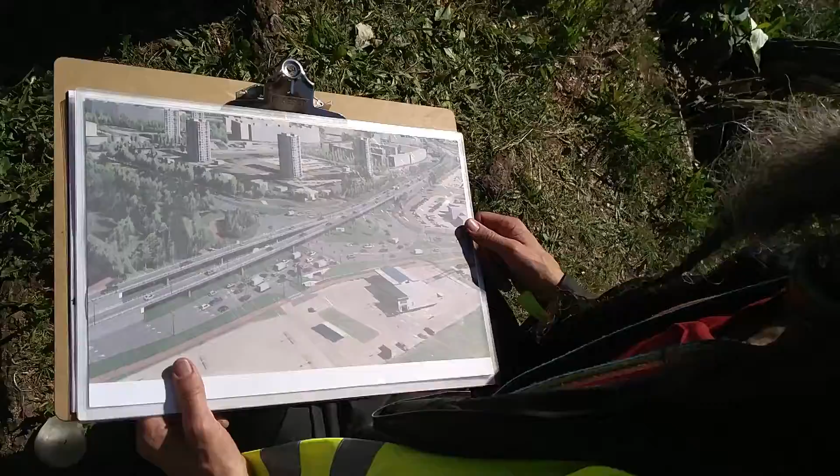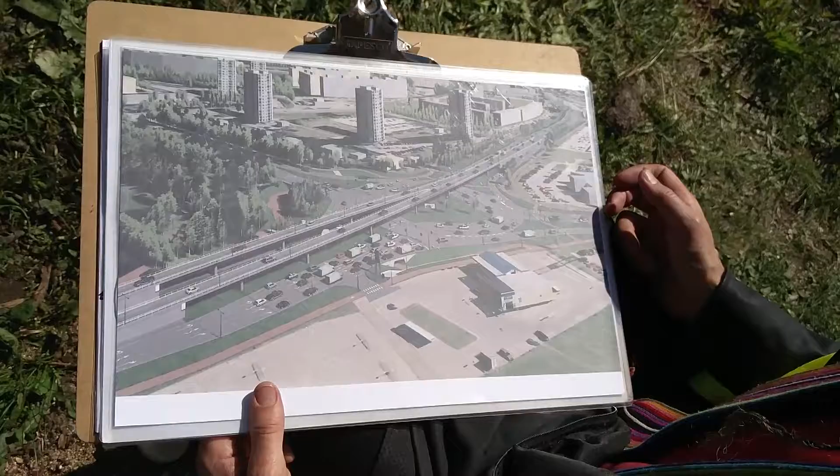So here we are, here we see Haabersti, the new Haabersti ristmiku project designed by the project. We are exactly here right now at the Paju tree, and if we look at the Paju tree location, we see it here. This is how the project has designed the road system, and they have designed the walking road.

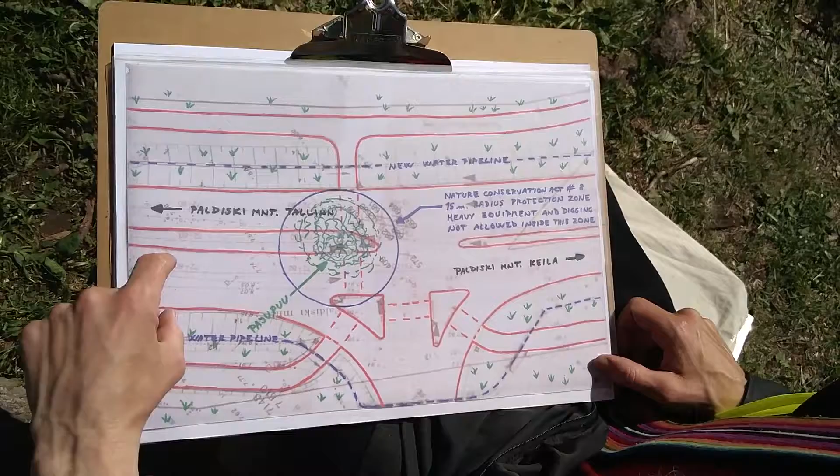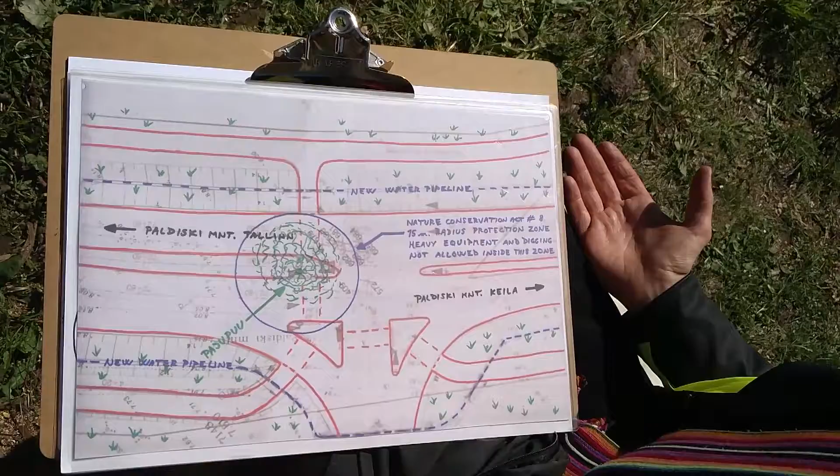They have designed 3 lanes in this direction, 2 lanes in this direction. Here are coming 3 lanes in this direction and 2 lanes in this direction. So 5 lanes in total with the new road system. What we see from the plan is that this tree, Paju, can be saved. There is no technical or practical reason why not to save it.

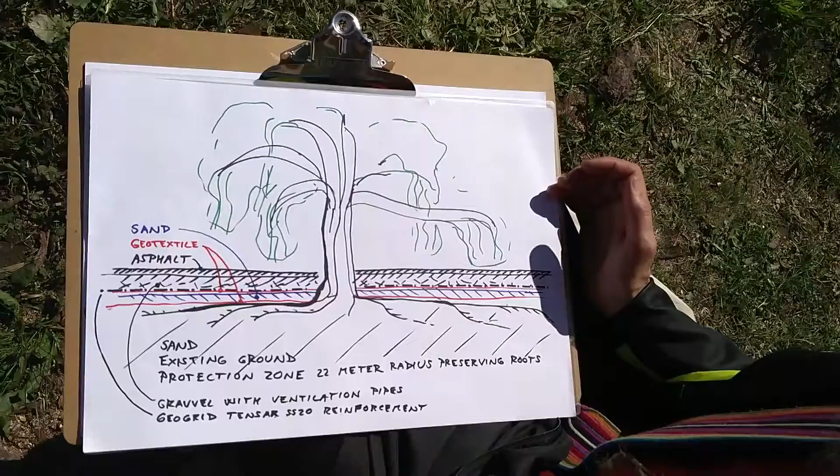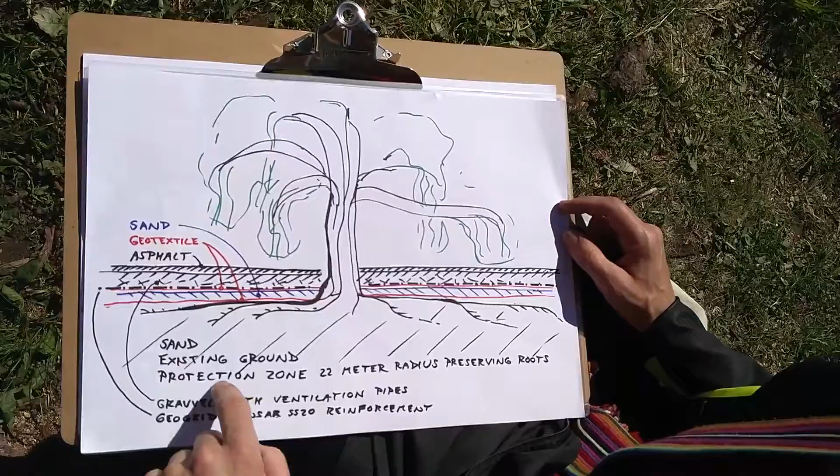And in the worst case, if the road is built exactly how it has been planned, it is fully possible with this technical solution. Here we have the tree. We put the geotextile on top of the existing roots in a protection zone with a 22-meter radius from the tree to preserve the roots. And then we put a pillow of sand 20 centimeters thick.

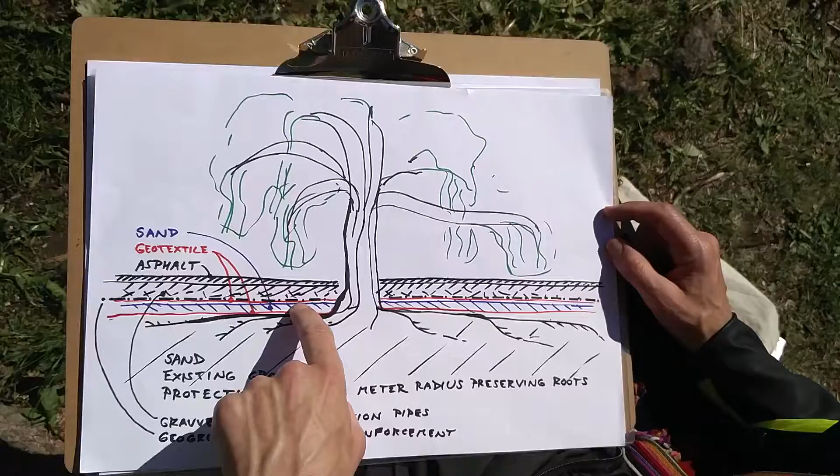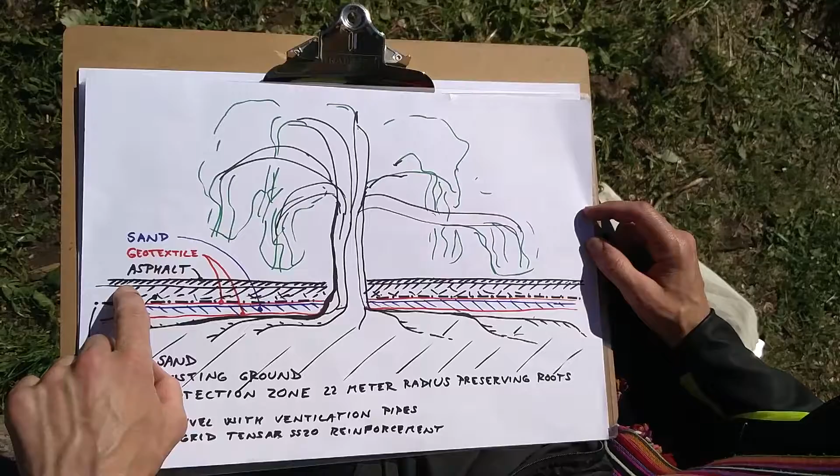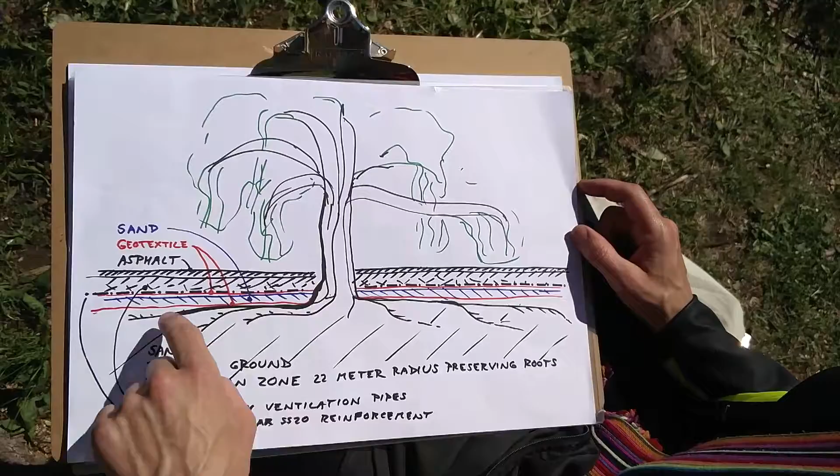Then we put the geotextile on top of it. Then we put the geogrid, Tensar SS20, reinforcement, and gravel with the ventilation pipes. And on top can be the asphalt or tiles. And this kind of system can be used for the walking roads crossing the root system and the car roads crossing the root system.

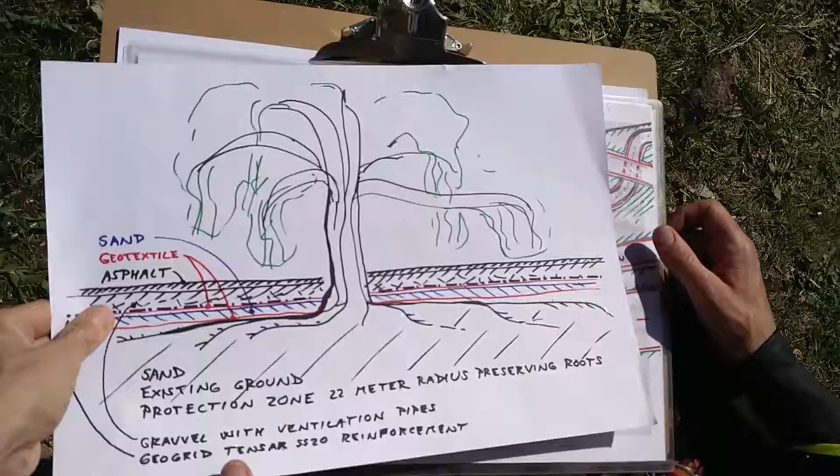Vegard, can you? Yes, very well. I'm good. And can you put it back? I would record the text, so the one who is going to watch your video will see what you have written.

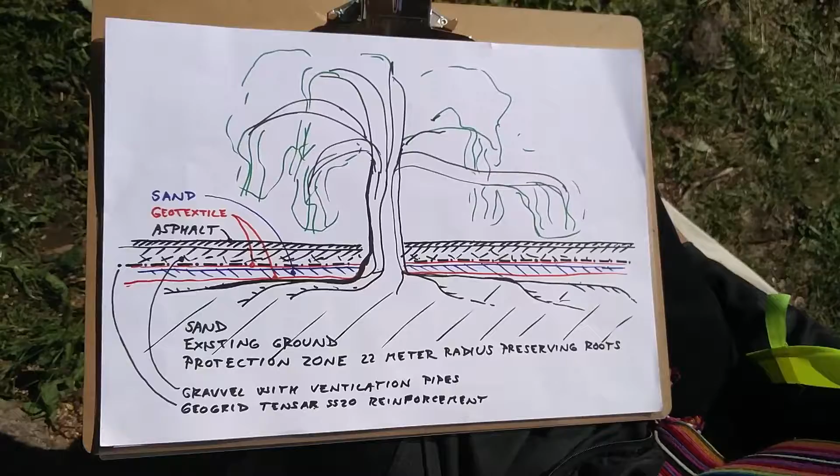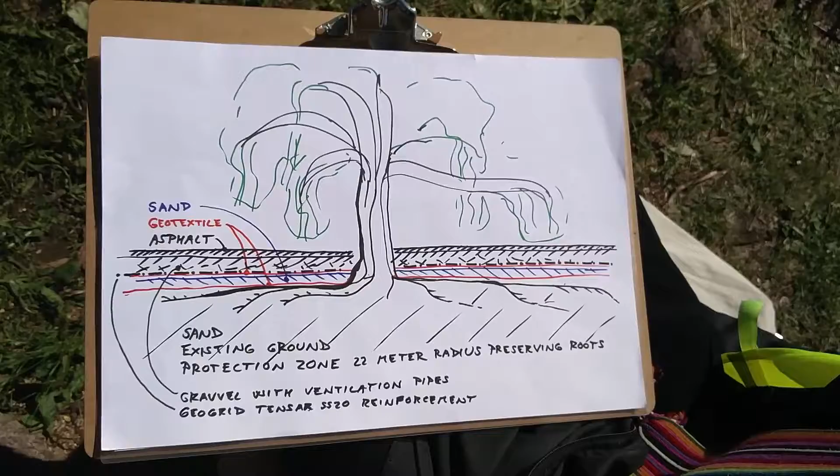And you, Vegard Kristoffer Emanuelsen, you are from Norway and you are an inhabitant of Väike-Õismäe, are you? Yes, and when I saw that this project is going totally far away from what was originally planned, and they are ruining the living space and the green areas, cutting the trees illegally, then I took action and wrote a complaint to the Kommunaalamet and Keskkonnaamet.

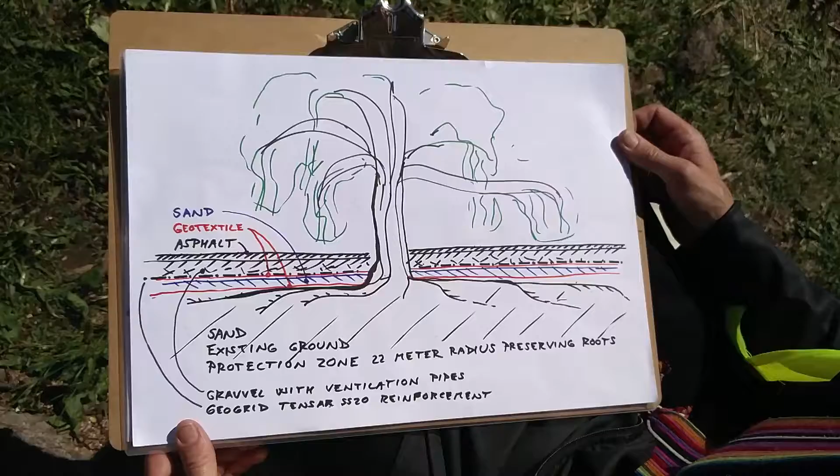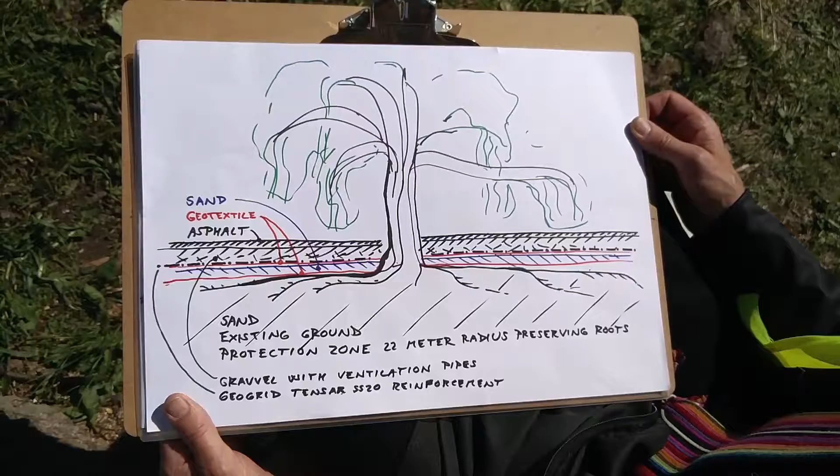And if you talk about your background, then your claims are supported by your education background. You are a city planner. You studied in university or college? Yes, in Norway. I am an industrial designer and product designer by education. But currently, I'm working with sustainable city planning in Tallinn, Tartu, and Pärnu on a non-governmental basis.

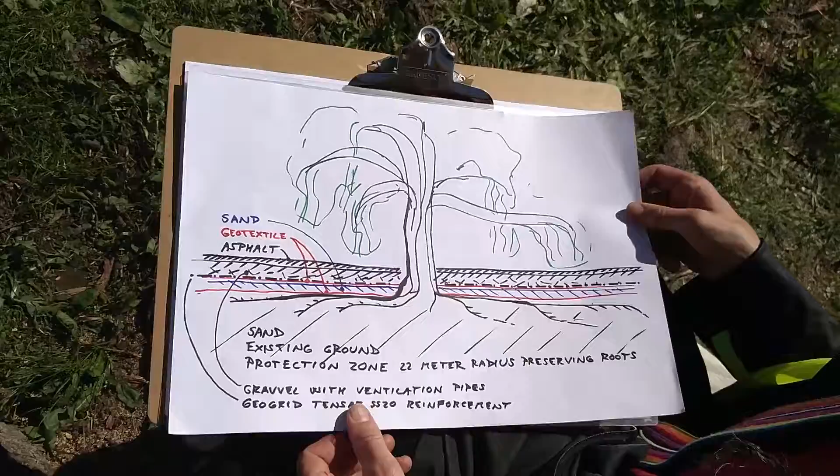All right. And I have been building and constructing all my life, so construction and technical solutions to challenges or problems are my profession and my skills. And what we see here is, when we look at alternatives to the plan of the project, it could look like this. So here we have the Paju tree. The planned ristmik will be moved to the Auroil gasoline station.

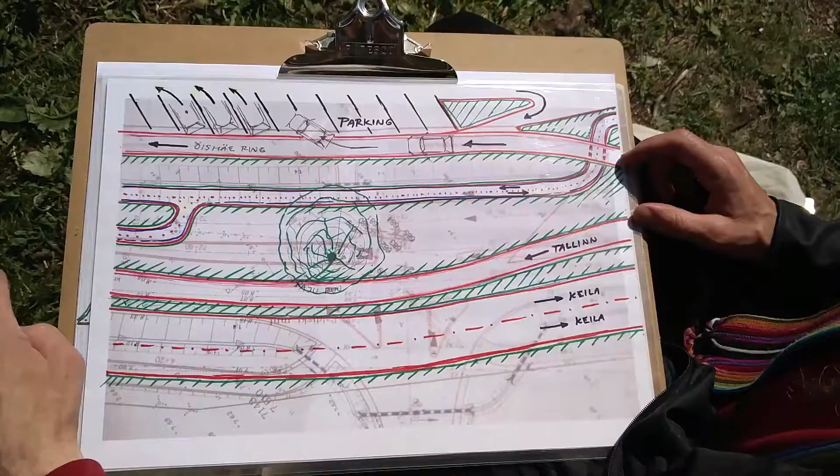And here are 2 lanes in direction Keila from Haabersti ristmik. 1 lane in direction Tallinn, which turns into 2 lanes before the bridge. Here is a walking road, which will go in the tunnel under. And here is a 2nd lane going to the local blocks where you can drive in and drive out for easy parking. And this lane will go around and end up in the Väike-Õismäe circle road.

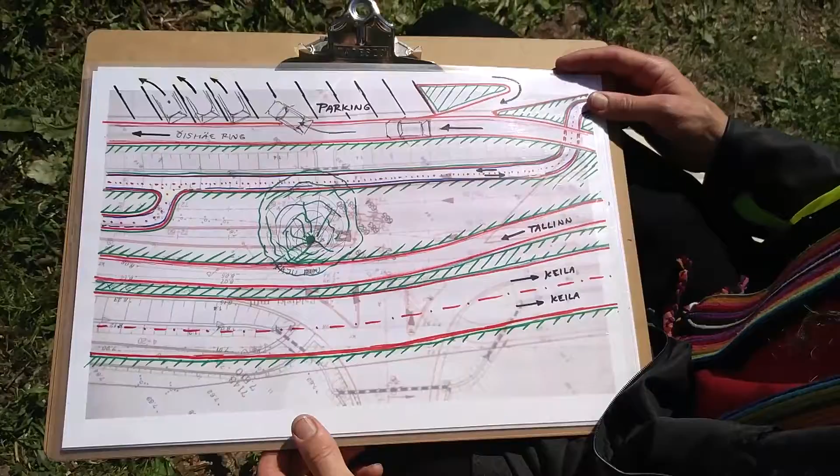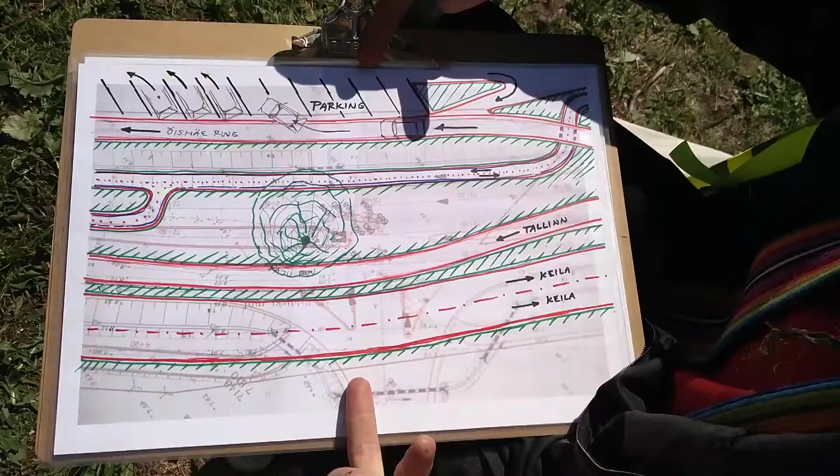So it will be quite comfortable to park your private cars in front of these apartment buildings, parking spaces, Road 163 and so on. Yes, and these local residents have complained to the local municipality that they would like 1.5 meter wider parking spaces because it's impossible to maneuver the cars normally. This plan can be built on the ground surface, just like it is, or these roads can be buried in a tunnel, and the same with the parking.

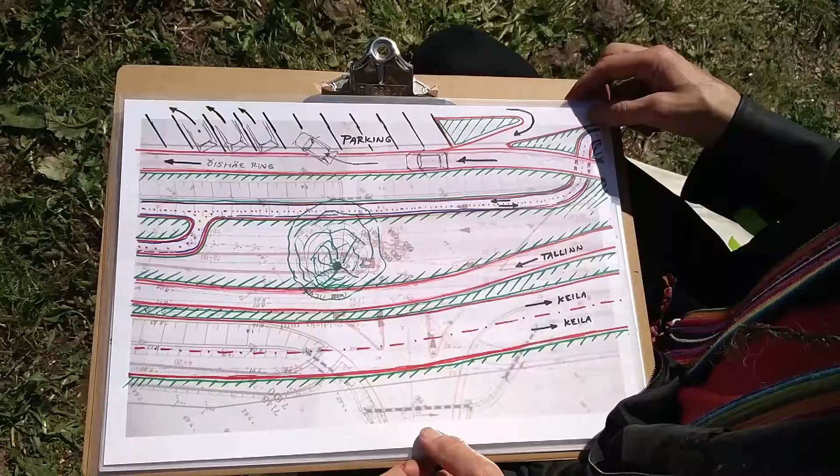And to be certain, if our deputy mayor in Tallinn, Kalle Klandorf, said on Wednesday to the public that there is no alternative to change the project, then you say that three driving lanes with a width of 3.5 meters fit on the side of the district? Yes, here. There is enough room.

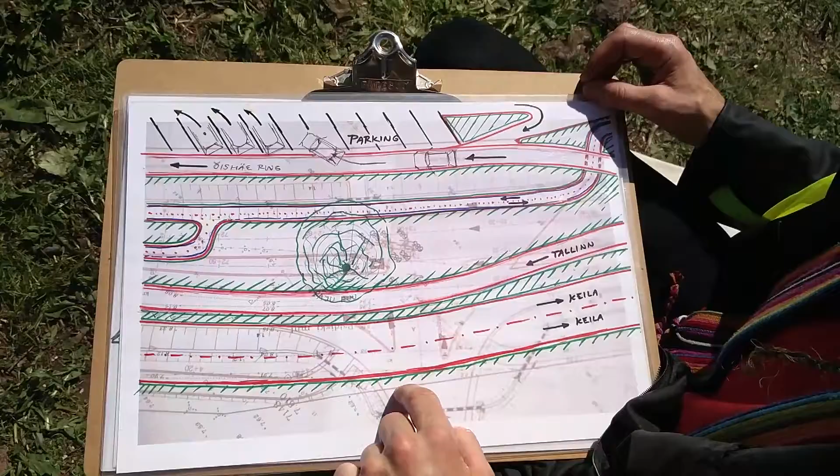Here we have the land border line. And the real map is a layer under this drawing. So here we have the border line, and here we have the other border line. But the state has also got the land. They have sold the land to the local municipality of Tallinn. So Tallinn is the owner of this land juridically, and Tallinn is also the owner of the existing parking place in front of the blocks.

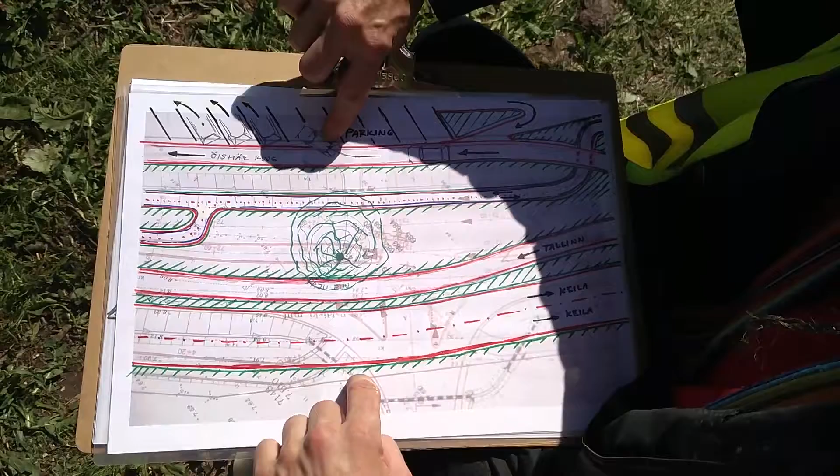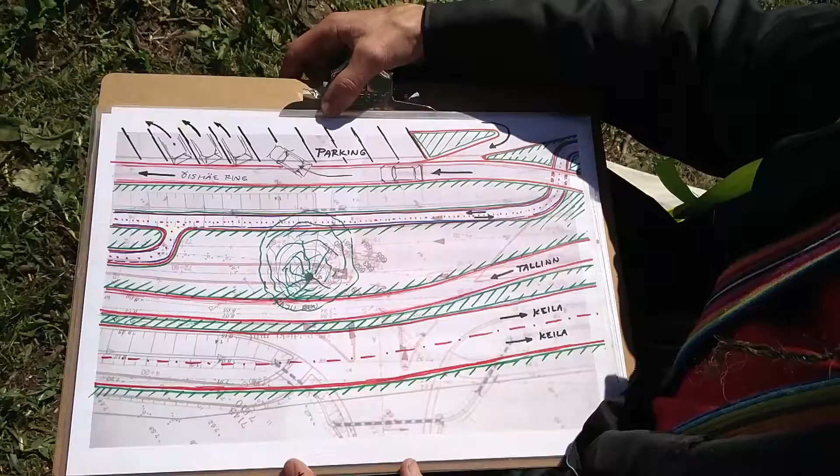Indeed, and actually this border is not in reality going here. It goes actually just a few meters from the block. So here is enough room to build the new road lines and parking place. So on the side of Kaarauta and district Pikaliiva, you say that next to the driving lane there is space for a light traffic lane as well, which is planned on both sides.

Yes, we can see from this drawing that here they have already planned a road going out from the Kaarauta, and this road is planned to go out here to the ristmiku. This ristmiku should be moved to the gasoline station, so this road which is planned from the Kaarauta can continue to the gasoline station this way. And between this planned road is enough room to make the light traffic road. And here you see the land border.

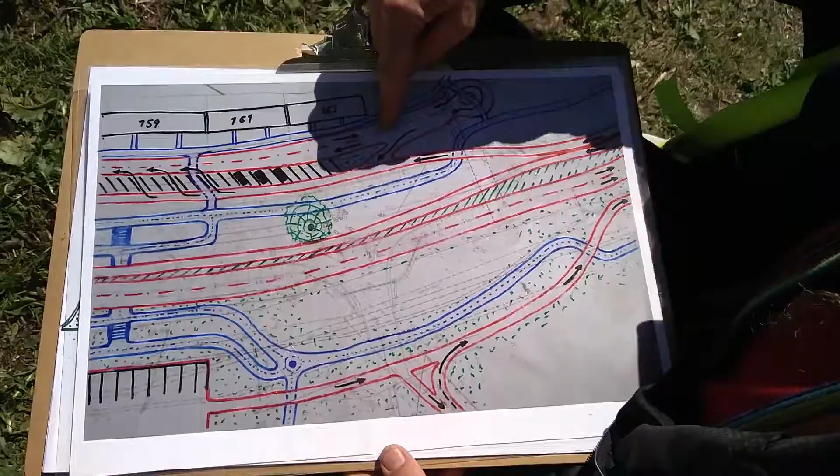So it is already in the plans to make this new road out of the Kaarauta parking place, and it is already in the plan that this will be built in connection with the new ristmiku. And here we see that there is enough room to make two lines in front of the block for driving, turn and return. And at the same time you can drive this way and drive in and drive out with the parking, easy parking.

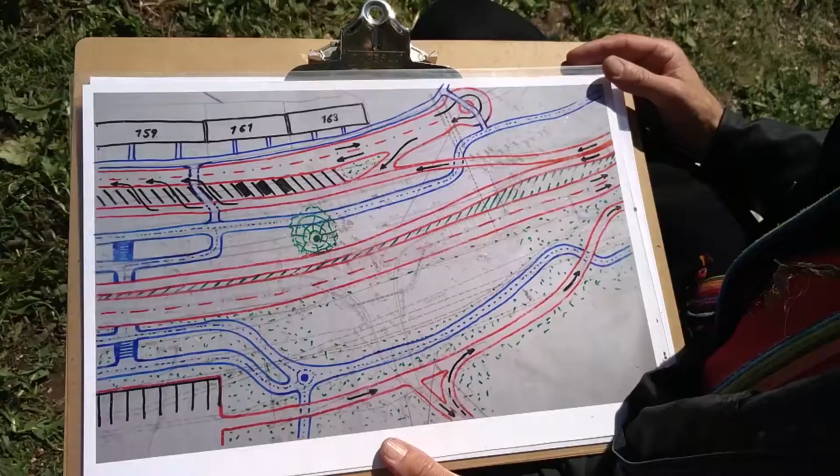And I see that those parking spaces are vertical parking spaces, which, as you said, makes parking easier than it is now. But unfortunately, it takes away some spaces if those are vertical parking spaces, because if they are horizontal parking spaces, then it is not so comfortable to drive in and drive out, but there will be some more parking spaces.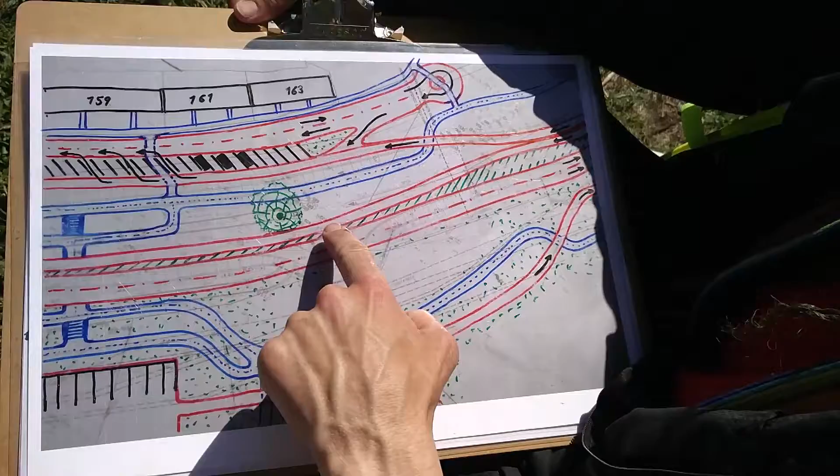Yes, today they are parking actually the same way in front of the block plus alongside this road. So today they are parking in the same way, but they can't drive in and drive out in one operation. So this parking solution is much better, takes the same space, but gives the local citizens a much better parking solution. And here we see that we can remove two red lights, one here and one from here, and put one walking road tunnel under. And one walking tunnel under is cheaper than to build two red cross lights.

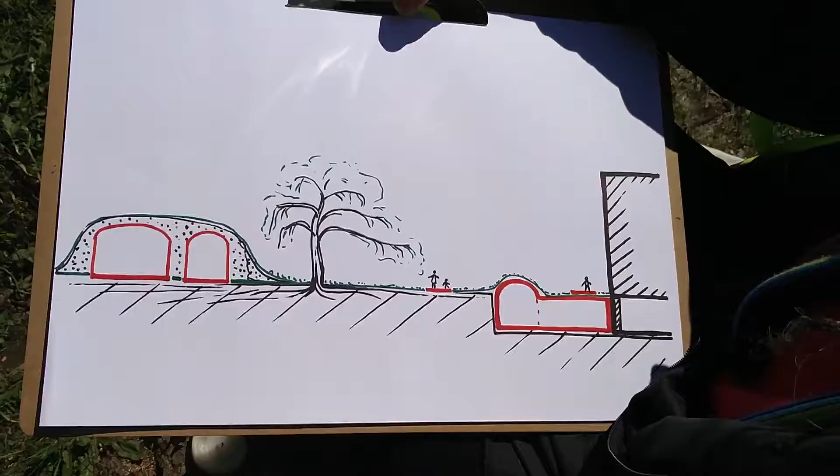Indeed. And we see also that there is enough room for the tree. And when we look at this drawing, it could look like this. In the best case, either the road is open without cover, or the road is covered, but the road can be in the same location. And this parking place can be leveled 3 meters down into the ground, or it can be on the ground surface. Two alternatives. And this road can be covered with sand and soil in one alternative, or just be open in another alternative. But the road location can be identical.

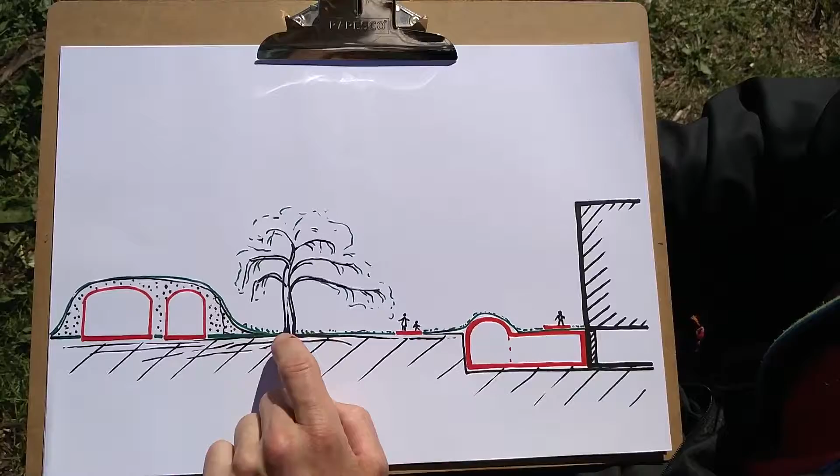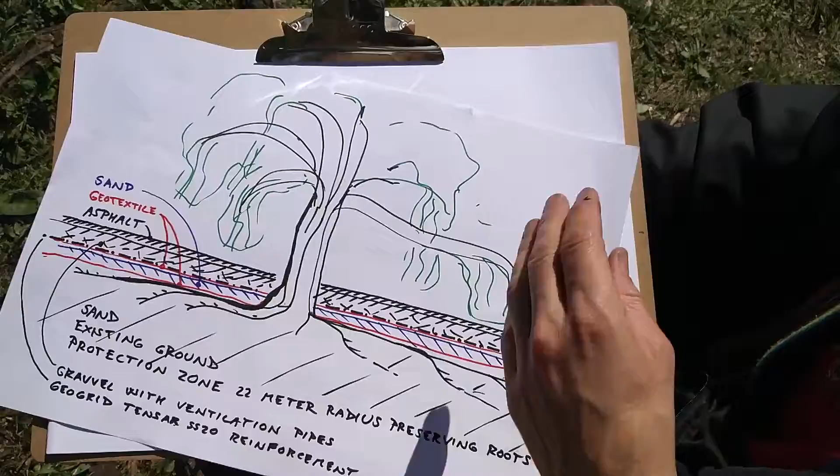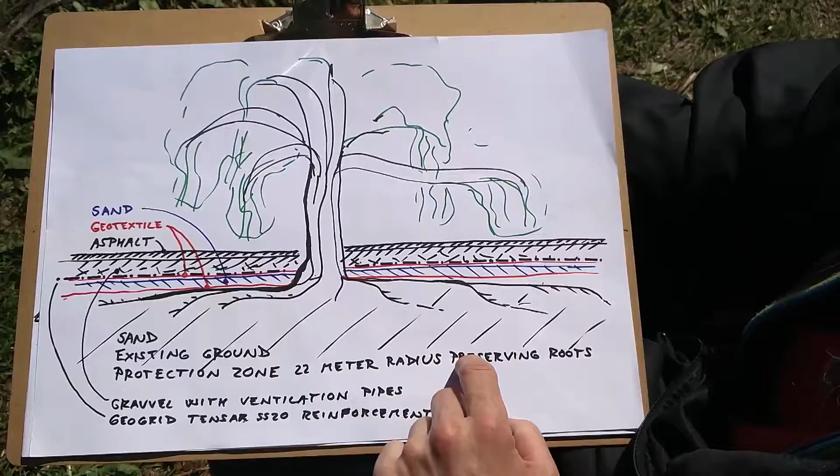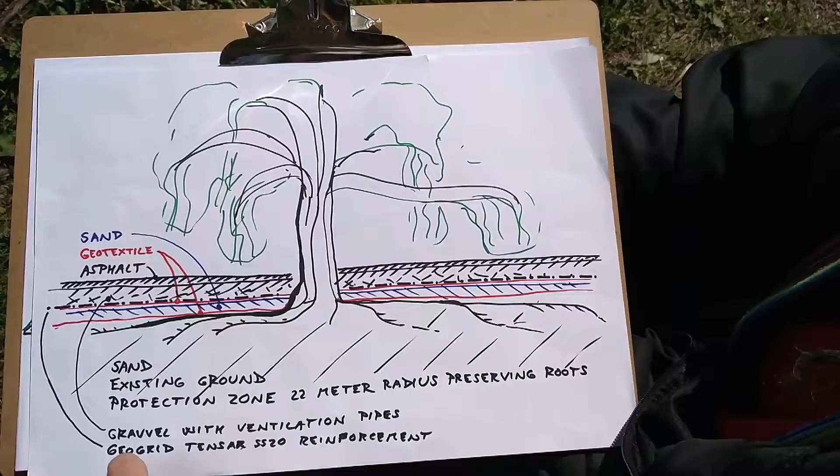And here we see that the system to protect the roots of the tree, this big paju tree, is fully possible. And in that case, we would apply the method here, where we are using the existing sand untouched where there are roots in a 22-meter radius around the center of the tree. And then we apply a geotextile, 20 centimeter protective sand layer, new geotextile, and the geogrid to take the stretch forces from the vertical load on the road. And then gravel with the ventilation canal, and then asphalt on top.

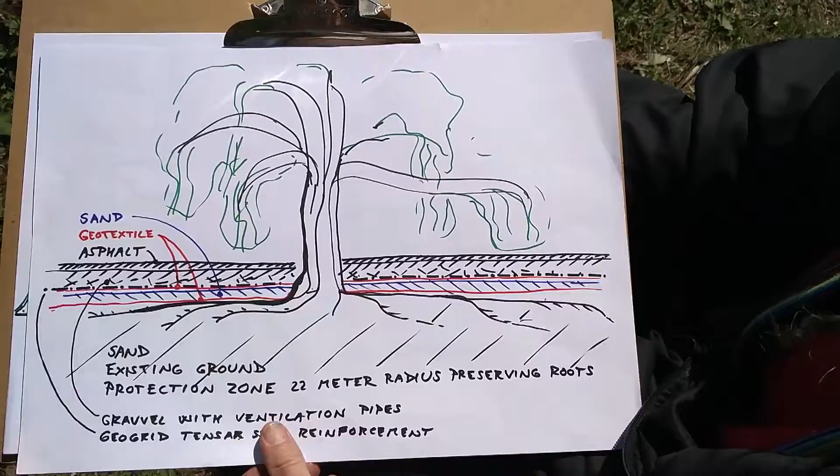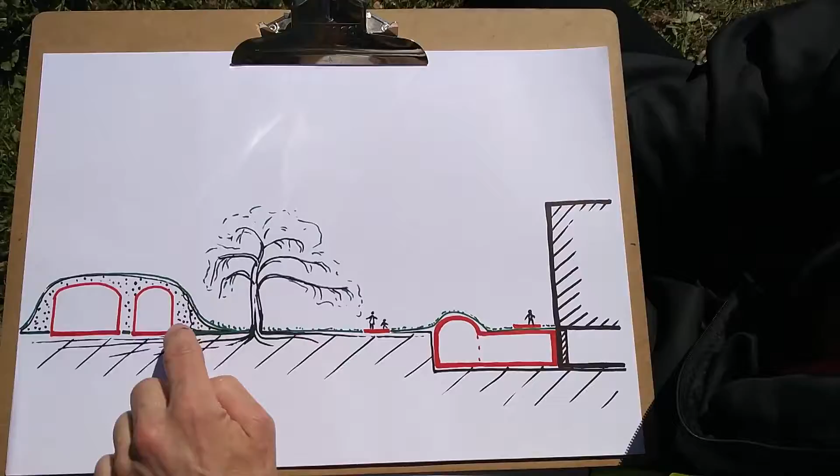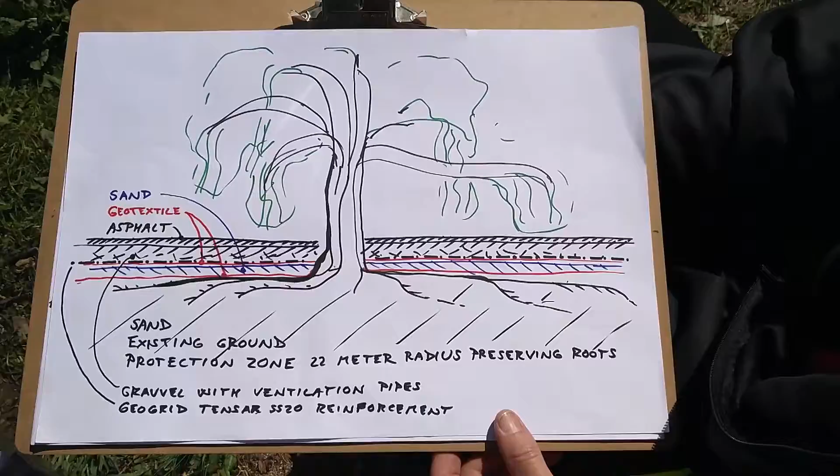Alternative to asphalt on top, it can be applied tunnels. Or if not to use tunnels, the road can be without cover, just ordinary, but with the same technical solution. To ask again for the viewer, can you show the scheme of tunnels once more, and repeat how many driving lanes?

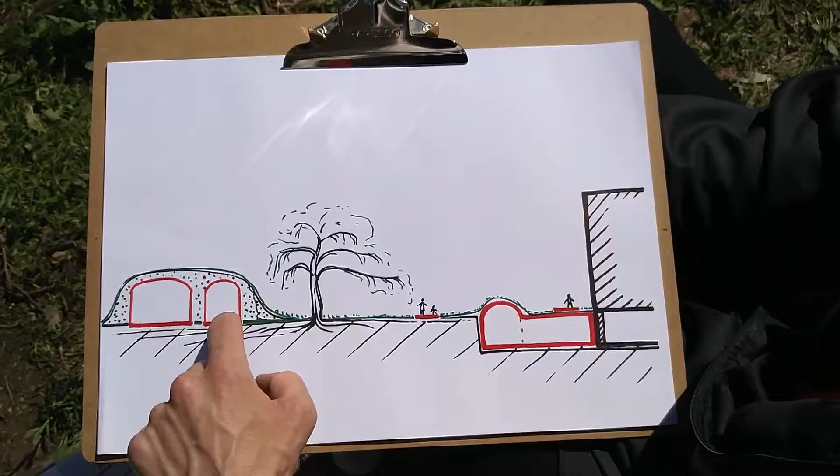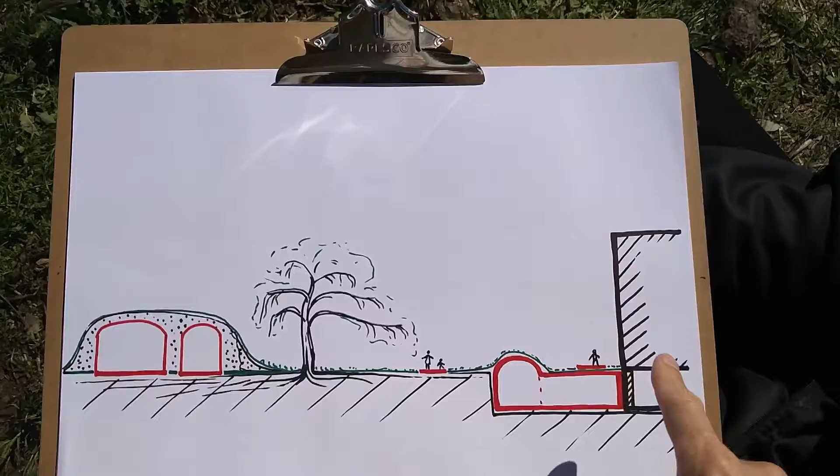Yes. Here is going one line from direction Keila to the Väike-Õismäe circle. One driving lane, like a local road, with opportunity to park in and drive out for the local residents. And this system can be buried in the ground, or it can be on the ground surface. And here is going two lines in direction Haabersti Keila, and one line in direction Keila Tallinn, and this line can turn into two lines before the bridge system, so one line can turn to the Haabersti circle road. So the apartment buildings are here, so here would be a light traffic lane on top, and another light traffic lane.